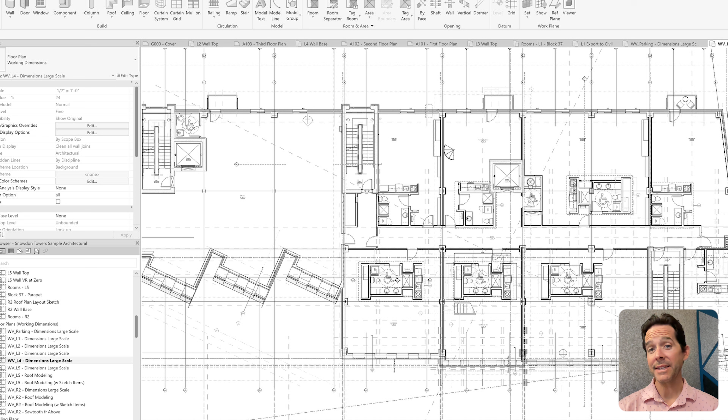But then you got serious about building, and your tools got serious too. The tools you use today are dull, disconnected, and not built for design.

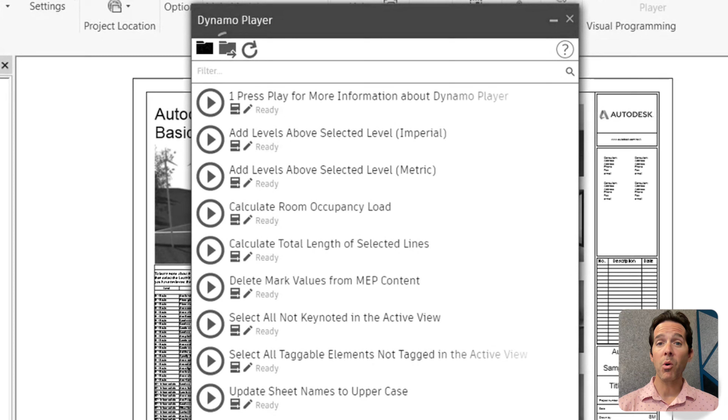You tried to speed things up by automating the boring and the repetitive. You learned the latest scripting tools. But it's just more stuff to manage, more systems to break.

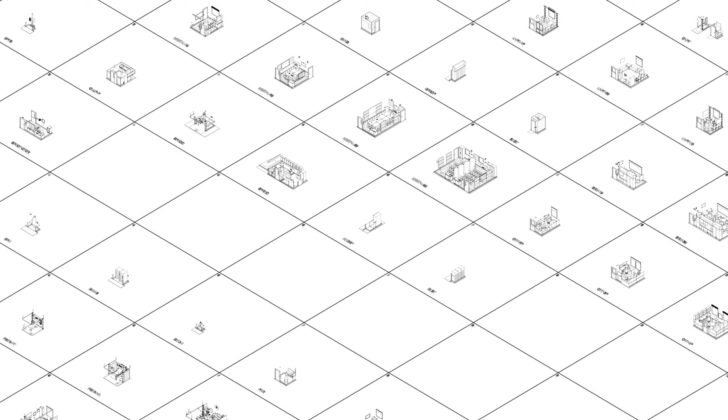Maybe it would be easier if you didn't have to start every project from a blank page. So you tried absolutely everything to capture and reuse expertise. You made template libraries. You wrote documentation on SharePoint. You hosted lunch and learns to explain it all.

But you still spend your days rebuilding models, converting Excel data into drawings, and drawings into Revit models, and Revit models into PDFs, endlessly rebuilding as you iterate on a design and move back and forth between applications. Until one day, you realize you're spending more time fighting your tools than designing.

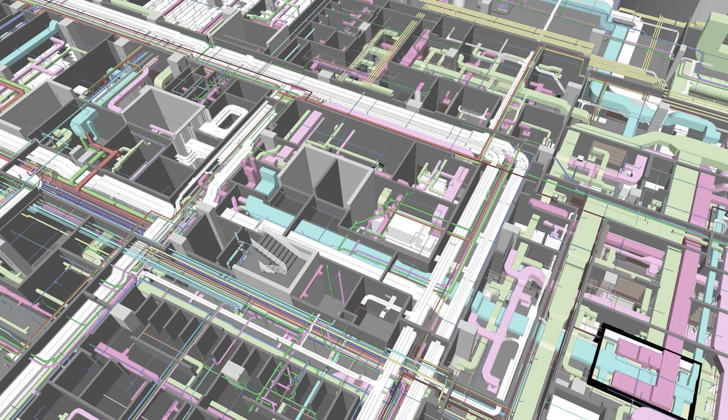We help build tools like Revit and Dynamo that you use every day. So we know that these tools are capable of representing enormously complex buildings. But they don't understand how elements interact as systems.

In 20 years of BIM, we haven't come any closer to encoding how buildings are designed. It's funny, because we know a lot of the rules.

We started Hypar with the belief that to truly change the way that buildings are designed, to truly accelerate designers, we'd need to encode those rules and make sure that they're available to everyone at the moment they're needed.

And our industry has invented a lot of ways to write down the rules. But because they're bolt-ons to existing applications, there's always been this tension between what the computer generates and what you model. Who's in control? Because design is messy.

The perfect automated solution almost never works. It needs to be tweaked.

There's never been a comfortable way for the computer to work with you and your team, to see what you're doing and help accelerate you, but to get out of your way when you just want to design.

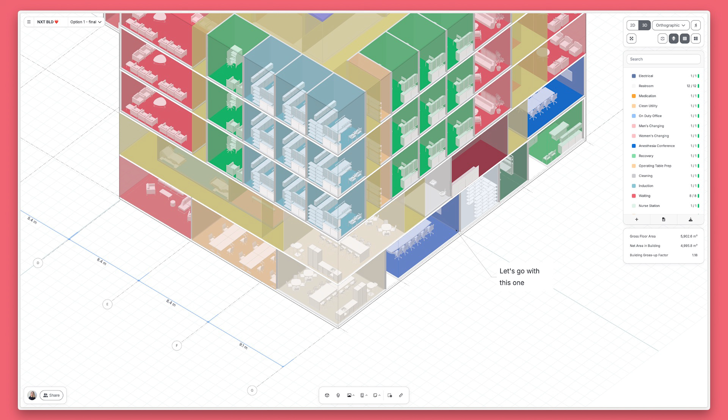With Hypar, for the first time ever, we've created a design tool that actually works with you. It understands what you're building, what you need, and offers help at just the right moment.

You've already seen the first hints of this with suggestions. Hypar can draw on your firm's libraries of content and layouts, or generative logic running on the platform, to suggest relevant design completions. Starting today, it goes a lot further than that.

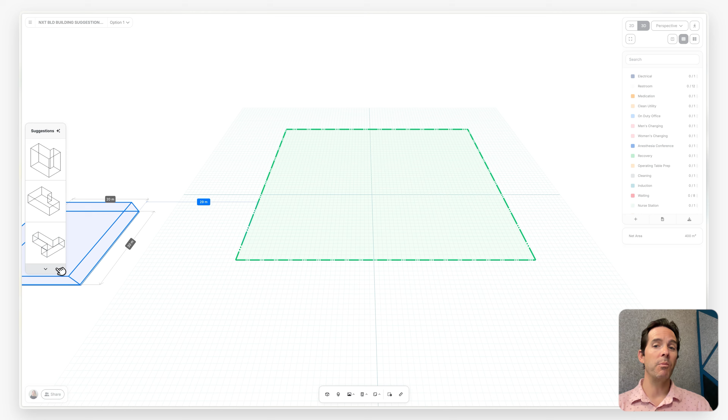Hypar understands your building's context, like its program requirements and site, and can suggest parts of your design. You can preview them and accept them with one click, or just ignore them.

The hallmark of a great design collaborator is that they understand your intent and they can riff on your design. Hypar can work like your structural engineer, suggesting grid configurations based on your building layout. If you tweak the grid slightly, Hypar understands your intent and provides an updated suggestion.

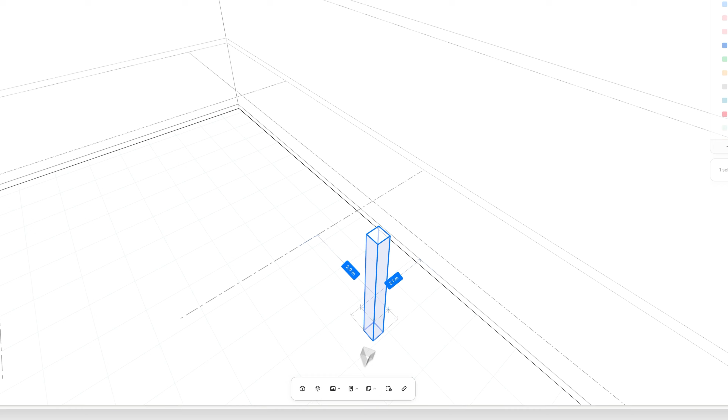Building grids in place, Hypar can suggest that you create all of the structural columns. If you edit the profile of a column, Hypar suggests that change for all of the columns.

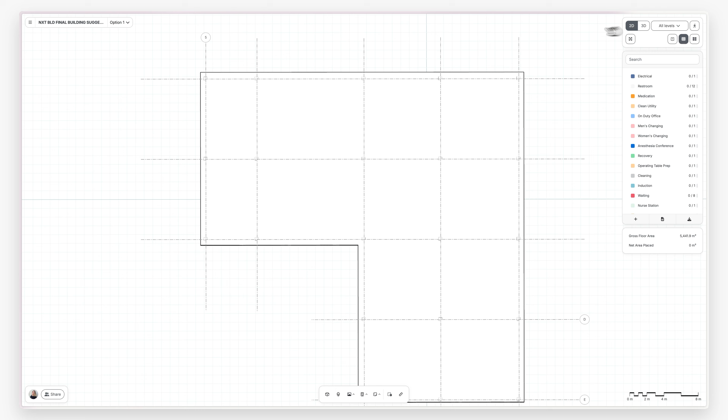Everything a suggestion creates is editable. You begin to work back and forth, manually editing the design and accepting suggestions to generate huge new areas of the design. And you can add and delete elements as well, because at the end of the day, you're the designer. You're in control.

What's really cool is that there's nothing to learn. You interact directly with elements. There's no complex interfaces full of buttons, sliders, and panels. Anyone can do this.

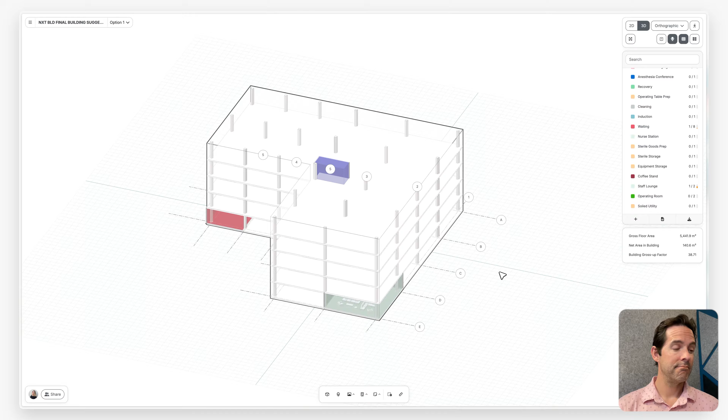This is fundamentally a new kind of building design. Maybe it's BIM 3.0. Our approach for mixing natural design with powerful automation extends far beyond suggestions. Because of this, we can create interactions that are not only fast and accurate, but intuitive and fun.

Something as mundane as turning your program requirements from Excel into space, a process which would usually involve hours of grueling manual work, becomes almost instantaneous. Because you just want to dump the blocks out on the floor and start playing.

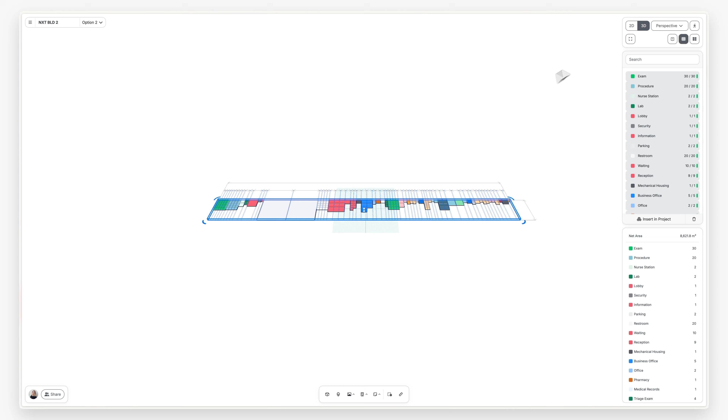That's the fun part. Pushing, pulling, and stretching space. In those early stages, you're flipping between levels of detail, planning whole departments in one moment, and making sure a single room fits all of its equipment in the next.

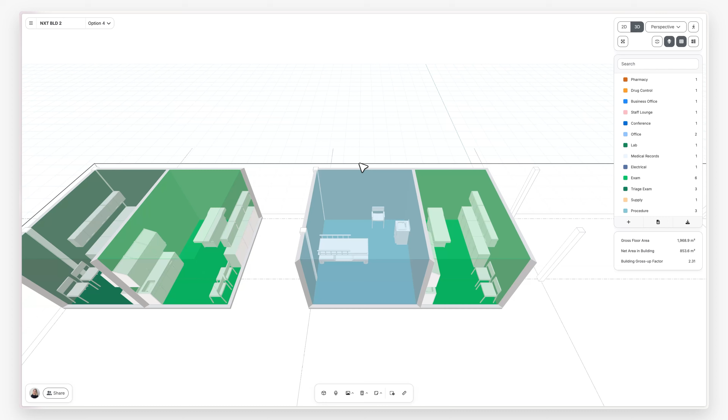And simplicity means that Hypar takes care of all of the details. If you want to copy a space, it shouldn't be a complicated operation involving deleting walls and rehosting elements. It should be one simple gesture.

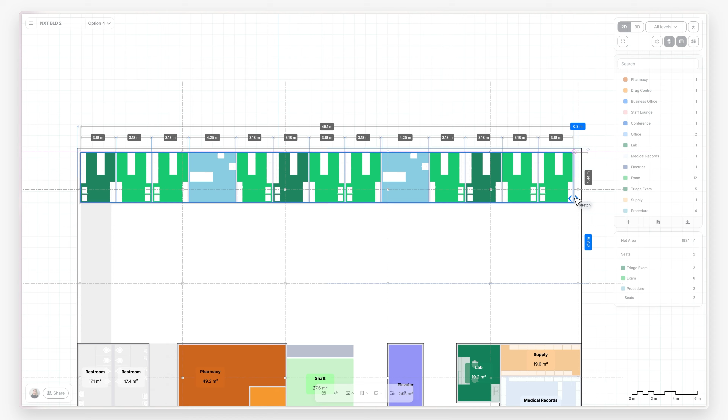And because program adjacencies are so critical to design, that same gesture should allow you to create a continuous pattern of spaces. Hypar can assume that if you grab all those spaces and resize them, that what you mean to do is flex the spaces while keeping them connected.

And it's easy to fine-tune grid-like arrangements of elements without first creating arrays or constraints.

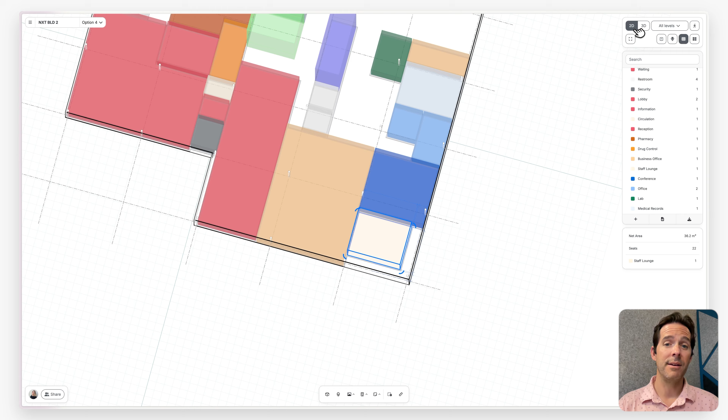And everything should come together with precision. We put an incredible amount of care and thought into something as simple as snaps, so you can work quickly and precisely across scales. And all of this is possible because the elements and the environment itself are intelligent.

In Hypar, walls know that they belong to spaces. When those spaces snap to one another, those walls join together. Elements that naturally interact with each other have an almost magnetic attraction.

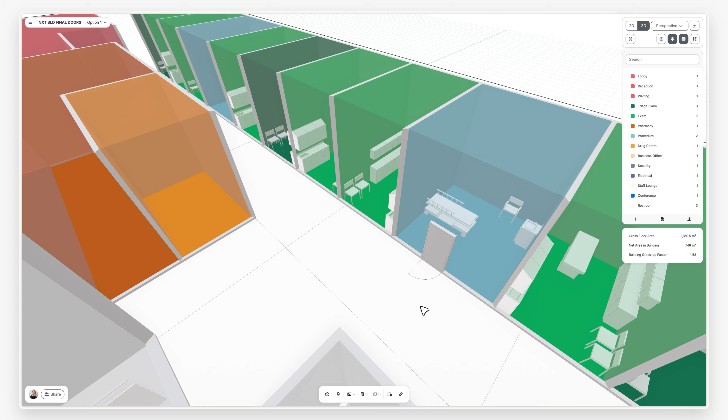Over the years, our users have created library projects in Revit to standardize and deliver best practices. But those libraries are hard to use and harder to maintain. And nobody wants to use a standard when they can just scavenge their old projects. So to jumpstart the future, Hypar makes it easy to turn those standards into flexible layouts in Hypar.

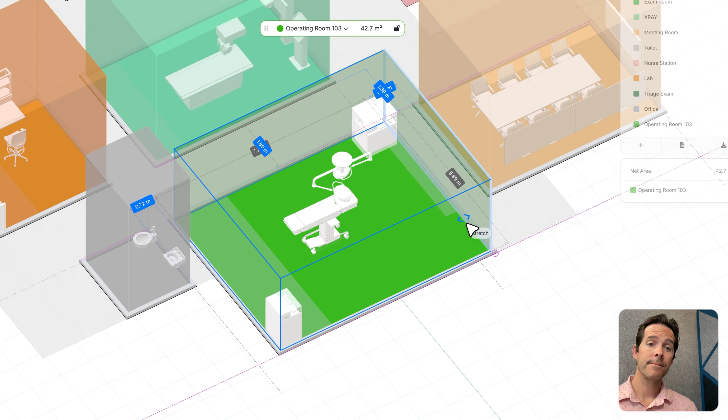Hypar's intelligence works at every level of detail. Layouts need to follow specific clearances set by codes and guidelines. So instead of relying on static dashed lines and manual checks, Hypar lets you embed those requirements and alerts you to clashes automatically. Then, you can have suggestions put those standards in your hand. Relevant design assistance right when you need it.

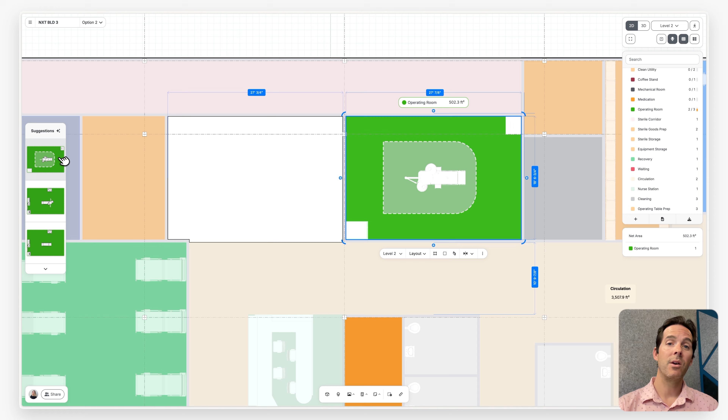And you don't have to make all your layouts in Revit. You can use your library of furniture and equipment and just start building or even remixing layouts directly in Hypar.

Instead of worrying about building template libraries, just design. Hypar remembers what you built before and suggests it to you. If you tweak the design, Hypar remembers that too.

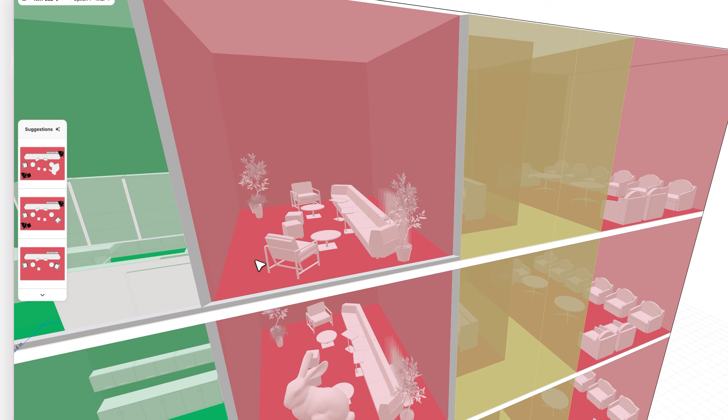And you're always working with a team, so of course Hypar has real-time collaboration. But truly collaborating on building design is much deeper than that. You have teammates that are working in Revit and Rhino, and they need to respond to what's being built in Hypar. So we enable seamless interaction with both.

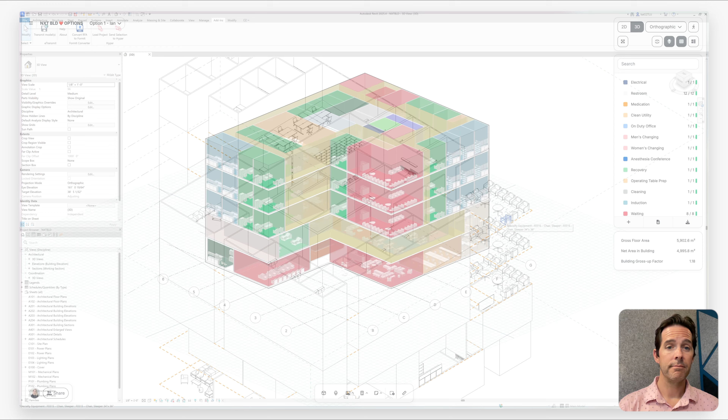Most importantly, Hypar understands that every building design is the result of teams developing multiple design options, often delegating design options to different teammates. So Hypar's intelligence works across design options too.

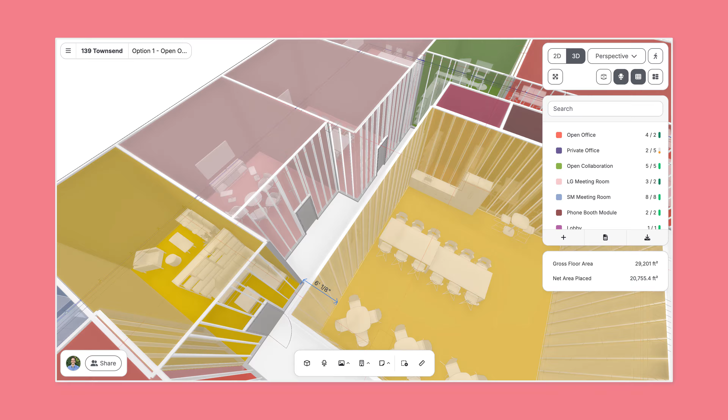In our testing, we found that this idea scales to every part of the building. We've tested with drywall and framing and mechanical systems and more. It's amazing. We're really proud that some of the world's largest firms are already using Hypar on healthcare, science and technology, mission-critical, and workplace projects.

We've spent hundreds of hours of careful observation learning how these experts want to design. That's why we're so focused on keeping you in the flow with simple, intuitive interactions and giving you incredible power with suggestions when you need them.

Our vision has always been to deliver the world's building expertise to everyone instantly. And to achieve that vision, we've created this simple, powerful building design application so that you can stop fighting your tools and get back to what you love.